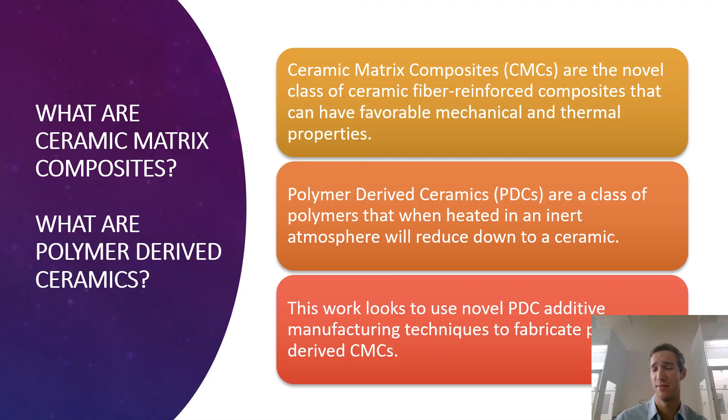So where are CMCs currently? There's a couple different applications for ceramic matrix composites. Most notably, hypersonics. They're used in both leading-edge applications as well as the propulsion systems, as they experience very high heat flux during flight operations. A second notable application in the aerospace industry is in gas turbine engines.

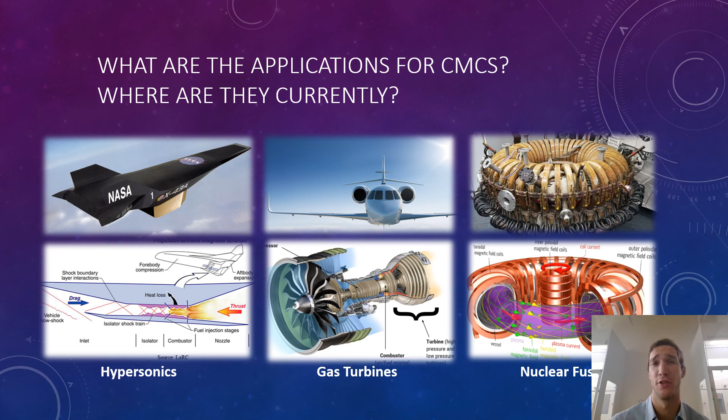In gas turbine engines, the hot section components experience very high temperatures, and to further increase the thermodynamic efficiency of next generation engines, an even higher temperature is required. In order to reach these higher operating temperatures, which in turn increase efficiency, a new material is needed, a ceramic matrix composite. Another use of ceramic matrix composites is in energy production, such as nuclear fusion or nuclear fission.

A broad overview of the entire project that I am working on. This presentation will focus just on the first bullet point. However, it is important to understand where this sits in the scope of the whole project. The first point, which is the topic of this presentation, is on developing a nanoscale control additive manufacturing process to create the matrix via polymer-derived ceramics around silicon carbide fibers to create that CMC we're looking for.

Next up is also using this same novel robotic system to create the matrix in these CMCs, and using that to create ultra-high temperature ceramic thermal barrier coatings. And then we'll move on to characterizing material fabrication parameters so that we can reach a microscale controlled porosity, thus permeability in these composites, which can be used for active cooling applications such as leading edges and hypersonics.

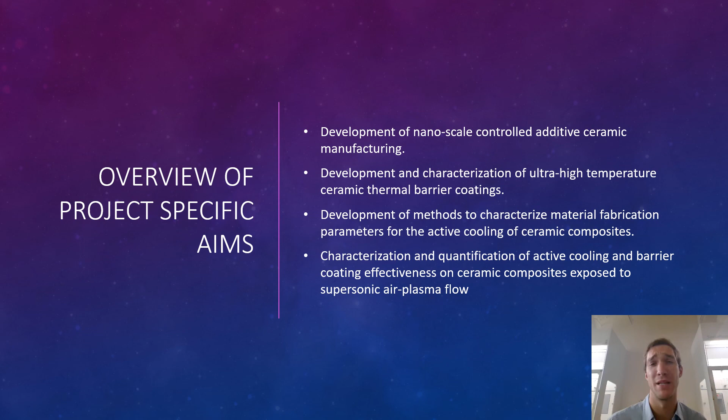The next step from there would be characterizing just how effective these newly fabricated CMCs and the respective active cooling aspects of these CMCs are when exposed to supersonic air plasma flows. Now, focusing on the first bullet point, breaking down into three objectives for looking at the buildup via PDCs of this matrix for the CMC.

We're looking at optimizing the robotic system deposition parameters to look for uniform adhesion, but without any cracking or bubbling in the matrix, very important. We're also going to be looking at matrix infiltration parameters. We looked at matrix infiltration parameters of polymer concentration, polymer type, as well as the type of solvent, and whether or not silicon carbide microparticles should be added to control the porosity and thus permeability of the CMC.

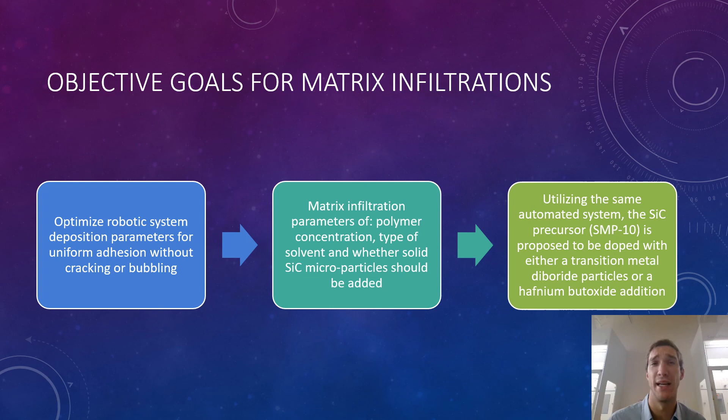And then using the same automated system, the silicon carbide precursor is proposed to be doped with either diboride particles or, more notably, the hafnium butoxide addition to increase the thermal resistance of these CMCs, and thus increasing the operating temperature at which they can survive and fully operate.

Now, I mentioned this automated system that I'm using for this project. Here is a basic schematic of how this system operates. It's enclosed entirely in an argon glove box that's positively pressured, and there's 4 different stages. The first stage is the material matrix bath, or smart syringe deposition, which deposits a diluted polymer precursor onto the sample, which is either a woven lattice of fibers or a single fiber tow.

That is then moved on these 2-dimensional robotic tracks in 2 axes. First into the 350 C furnace. This is the cross-linking furnace. From the cross-linking furnace, we then move into the 900 C furnace. This is the pyrolysis furnace, and then we move into the cooling chamber.

It's very important to have this cooling chamber, for if we do not have it, the sample is too hot, so that when the polymer is redeposited onto the structure that we're looking to fill up, it doesn't wet out enough and you actually get bubbles.

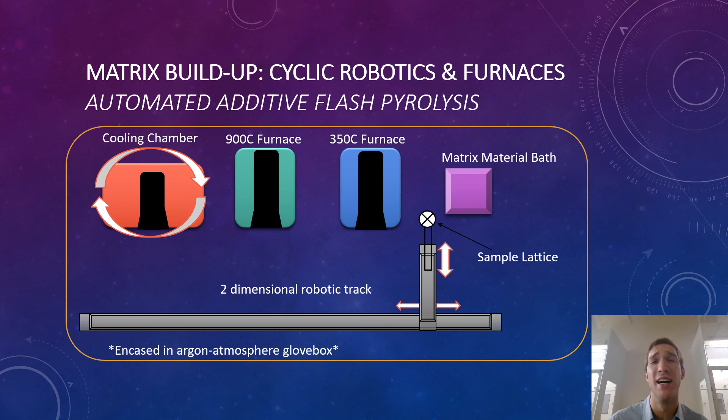I will show an image of this later on. You can see what happens if the sample is too hot when you try to re-infiltrate the polymer into the matrix.

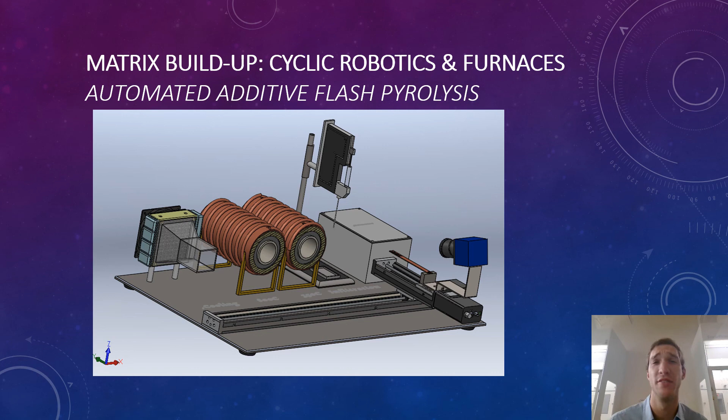Moving on, here's just a SolidWorks model of how the system is currently designed and how it actually physically looks currently. And then a few pointers on this matrix buildup. We're looking at building up material in between the fibers by layer. So each layer deposits a very thin, within the sub-micron range of ceramic residue, and then we're building it up layer by layer so that we don't end up with a lot of cracking in the matrix due to the shrinkage of the ceramic as it undergoes pyrolysis. Thus, the repeated coatings are the best way to avoid voids or cracks within the matrix due to that shrinkage.

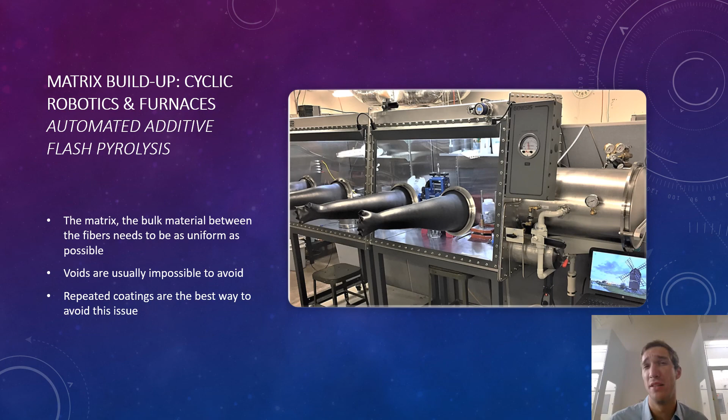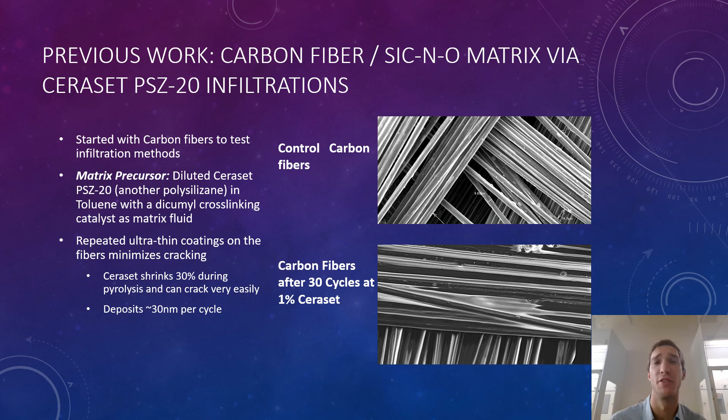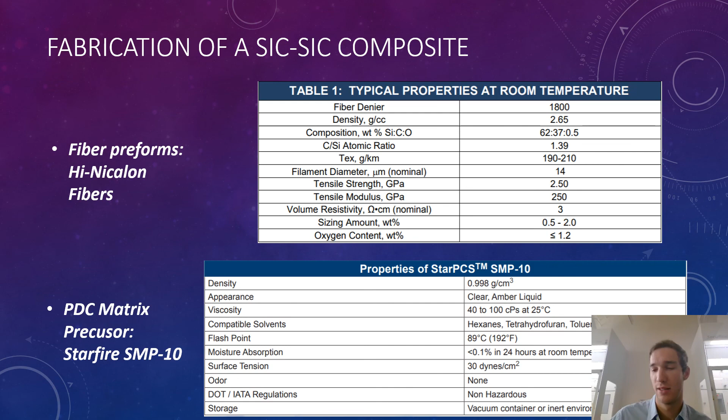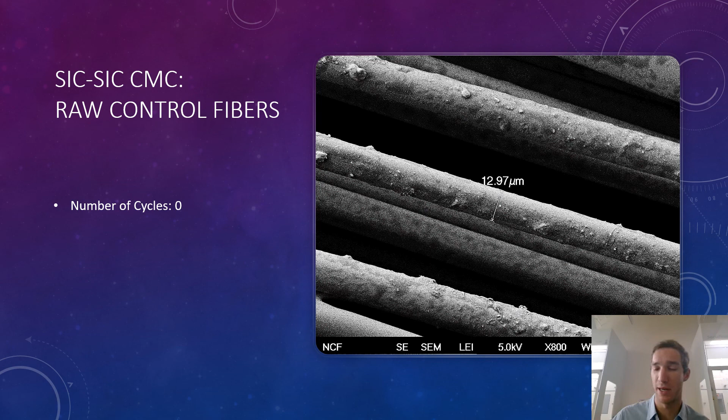All the subsequent images, as well as this image, have 1% the SMP polymer per mass diluted with hexane, and then the optimization at this point for the automation system in the robotics is to have 25 seconds in the cross-linking furnace, 50 seconds in the pyrolysis furnace, and then 30 seconds in the cooling stage.

Moving on from 5 cycles, we can see 10 cycles. Here we can see a more significant buildup of interstitial matrix between fibers. We do have cracking. As you can see, a large crack coming down the middle. This isn't a major issue at this point because many of the cracks, as they form initially in the cycles, are actually re-infiltrated by subsequent infiltrations, and they actually get filled up.

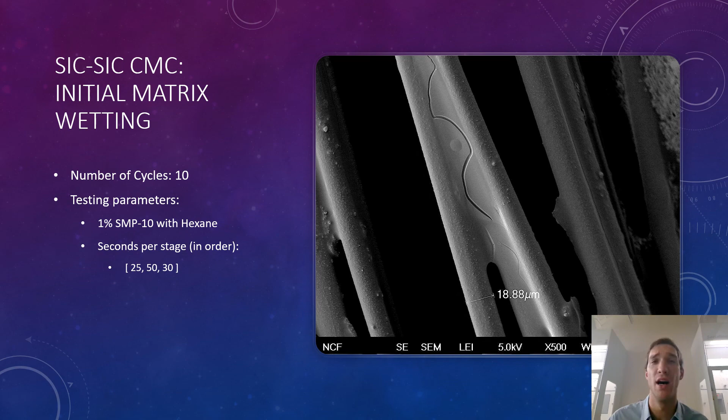Here we're looking at 30 cycles. This image has the 300 seconds of primary burn-off, which the previous slide did not. Again, I'll get to that in a second. But this one, as you can see, it's a really significant matrix buildup. Again, that has good adhesion without any cracking or bubbling. You can see a few small cracks, but again, those can get filled in by subsequent infiltrations.

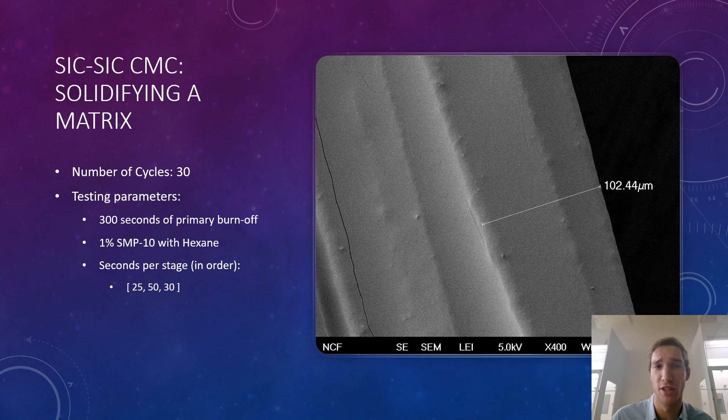And then we're going to move on. This is a good result. It's really solidifying a pretty significant matrix here. And then again, as I mentioned, we're going to compare the diameter so we can get an initial thought as to what the average deposition per cycle is on this.

Some early cracking, as I mentioned, that 1.4 micron crack. This is another zoomed-in image, and you can see that there is some actual buildup happening within that crack. So you can see that it cracked and then has been filled up partially by a subsequent infiltration.

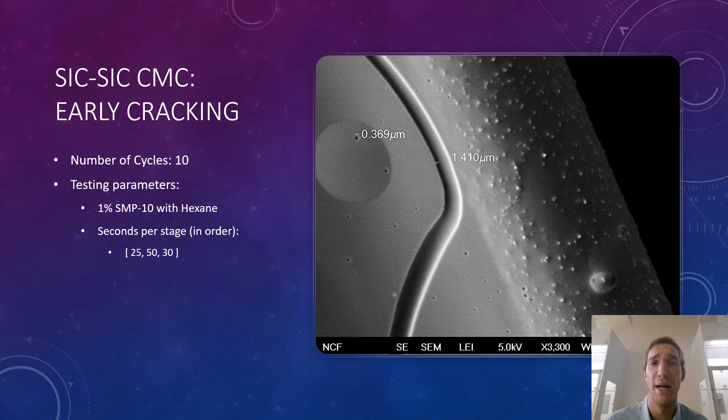Again, when I mentioned that fuzz on the 15 cycle, this one did not have the 300 second initial factory coating burn off. So this was hypothesized to be the reason for this kind of fuzz impurities on the fibers, because all of the samples that did have the 300 second primary burn off did not exhibit this surface roughness.

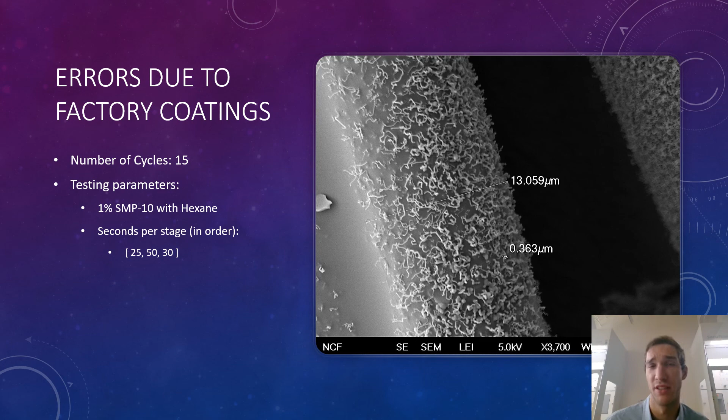And then there was some work done by Ben Robles that was reprocessed this year. This work was already presented last year, but there was some reprocessing done. This work looked at taking green fibers and hanging them vertically in a furnace. They're green, right? They've been cross-linked but not reduced down into a ceramic fiber.

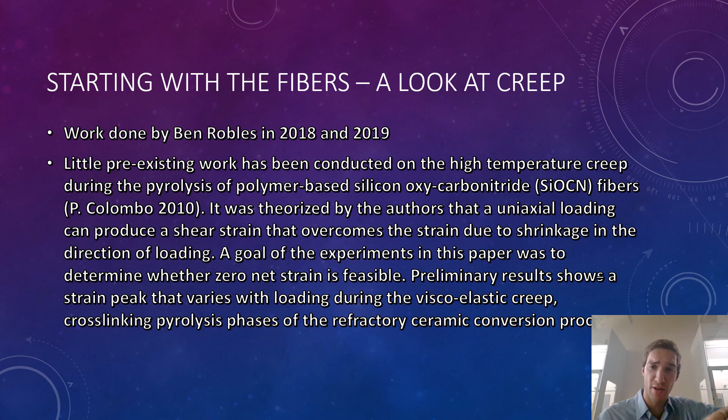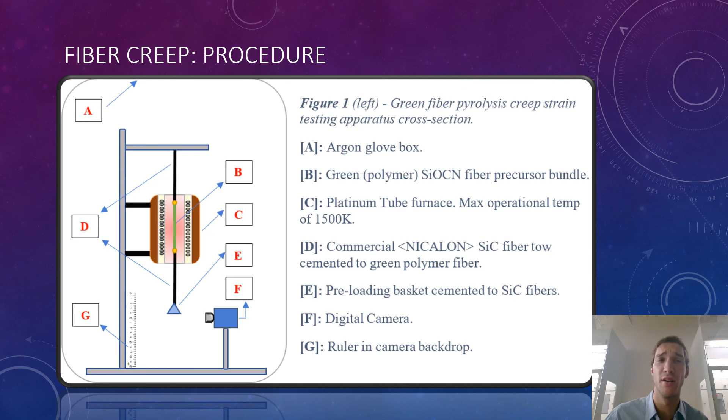As you can see in part E, this is the loading basket, so the fibers are preloaded, and then as it's heated up, they experience viscous flow, and then as it undergoes pyrolysis, it shrinks down that nominal 30% shrinkage due to pyrolysis as a reduction into ceramic. This was a fairly basic setup, and we'll be doing more research into this. This was just an initial reprocessing of some initial data that was already taken.

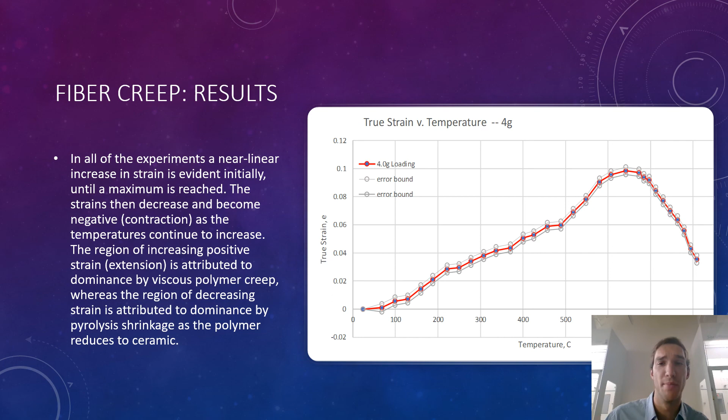And then we'll be moving into those next bullet points that I talked about: permeability testing by looking at micro-controlled porosity of samples, as well as mechanical testing, and then the supersonic air plasma testing.